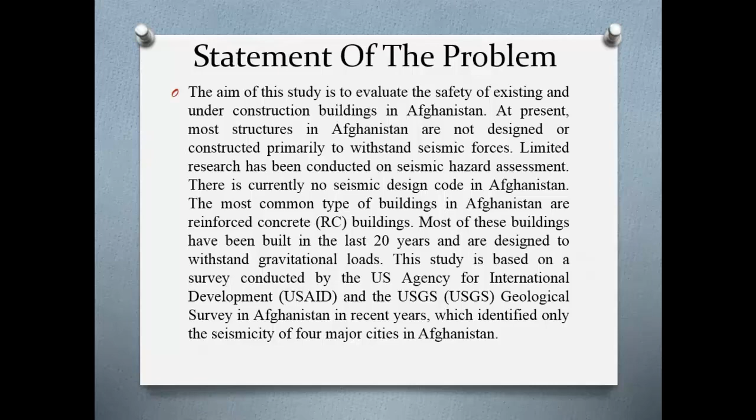This study investigates the seismic damage of 3 most common mid-level RCC buildings, which are very common and include about 60% of mid-level RCC buildings in Afghanistan. The selected buildings for this study are as follows.

1. 12-story RCC building with base plan 46 by 21 meters with shear wall and elevator under construction in Kabul city. 2. 12-story existing RCC building with base plan 14 by 21.5 meters with shear wall as well as elevator in Kabul.

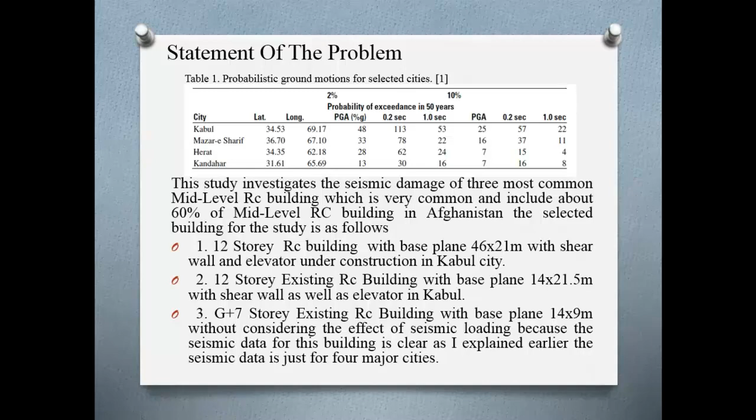3. A G+7-story existing RCC building with base plan 14 by 9 meters without considering the effect of seismic loading. Because the seismic data for this building is not clear, as I explained earlier, the seismic data is just for 4 major cities. Here, 4 major cities: Kabul, Mazar-e-Sharif, Herat, Kandahar. The last building is located in the Bamiyan province. We don't have any seismic data for Bamiyan.

As 40% of existing and under construction buildings in Afghanistan are not considering the effects of seismic loading, or just loading assumption in case of structure design, in this study I have included buildings considering the seismic loading as well as without seismic loading and design.

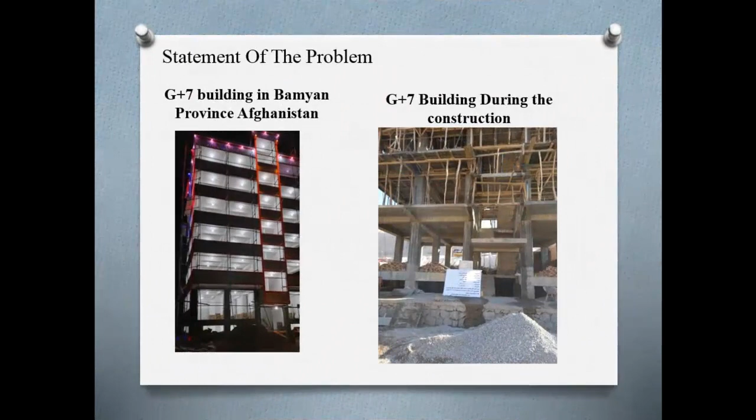3 levels of performance were considered in this study, which include immediate occupancy, life safety, and collapse prevention; gravitational pressure using force control method, and lateral pressure with displacement control using SAP 2000 version 20.2 software pushover analysis. Here is the G+7 existing building in Bamiyan.

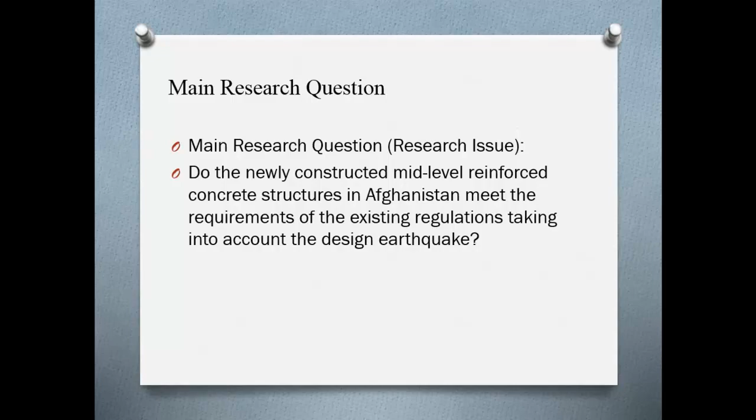Main research question: do the newly constructed mid-level reinforced concrete structures in Afghanistan meet the requirements of existing regulations, taking into account the design earthquake? In general, seismic forces have a dynamic nature, but the design code allows in this research to use the equivalent static analysis method using ASCE 7-16 code.

According to ASCE 7-16 and IBC 2012, buildings should be designed with 2 levels of earthquakes. The design earthquake, which is an earthquake that has a 10% probability of occurrence during the 50 years useful life of the building, and the maximum earthquake that can be expected at the construction site,

which refers to an earthquake whose probability of occurrence during the 50 years of useful life of the building is 2%. The IBC design code is obtained using new maps prepared by the United States Geological Survey, USGS.

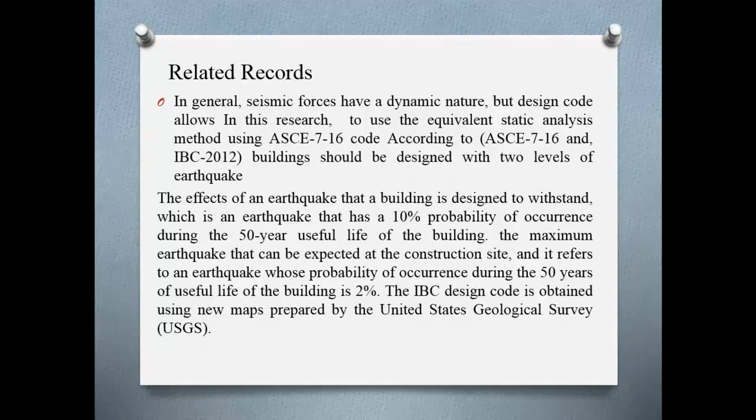In 2020, Paraven Oggu and colleagues conducted a case study on existing 4-story and 6-story structures. Plastic hinge formation during nonlinear static analysis performed on the existing G+3 structure showed that some structural components were inadequate. These observations are clearly expressed from the G+5 structure analyzed prior to retrofitting, as well as from the DCR calculations performed for the earthquake load case.

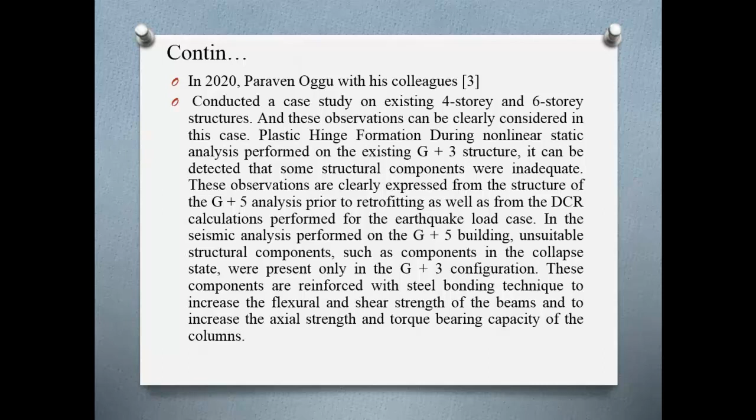In the seismic analysis performed on the G+5 building, unsuitable structural components such as those in a collapsed state were present only in the G+3 configurations. Those components are reinforced using a steel bonding technique to increase the flexural and shear strength of the beams, and to increase the axial strength and torque bearing capacity of the columns.

Khalid Elhadi and colleagues evaluated the seismic performance of a 6-story reinforced concrete building in the city of Abha. Using pushover analysis, the results were compared in terms of base shear, displacement, and pattern of plastic hinge formation. Many results can be drawn from this study. The main conclusions are as follows.

Pushover analysis can identify weak elements by predicting the failure mechanism and accounting for redistribution of force during progressive yielding. It may help engineers take action for rehabilitation work.

Second, the results show that designs by ESEE and IBC 2012 are found adequate. Third, the buildings designed according to ESEE and IBC 2012 are satisfactory. The performance point location is at IO, meaning immediate occupancy level. This means the design satisfies the pushover analysis according to ATC 40.

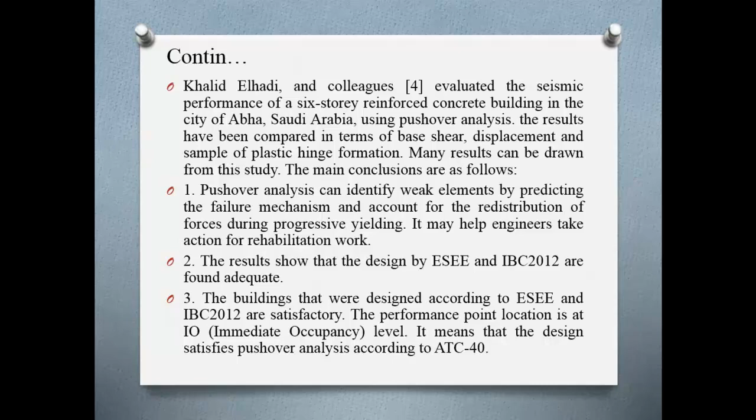Assumptions: evaluation of a 12-story building under construction which has 2 underground floors and 10 upper floors; evaluation of an existing 12-story building which has 2 underground floors and 10 upper floors; and evaluation of an existing 8-story building which has 1 basement and 7 upper floors.

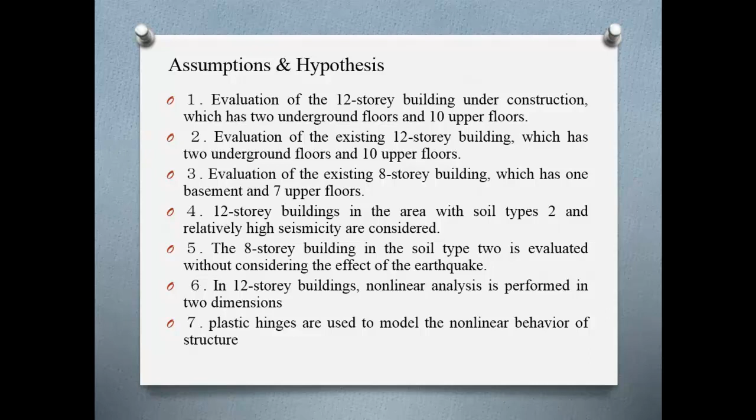For the 12-story buildings, areas with soil type 2 and relatively high seismicity are considered. The 8-story building on soil type 2 is evaluated without considering the effect of the earthquake. In the 12-story buildings, nonlinear analysis is performed in 2 dimensions, with plastic hinges used to model the nonlinear behavior of the structure.

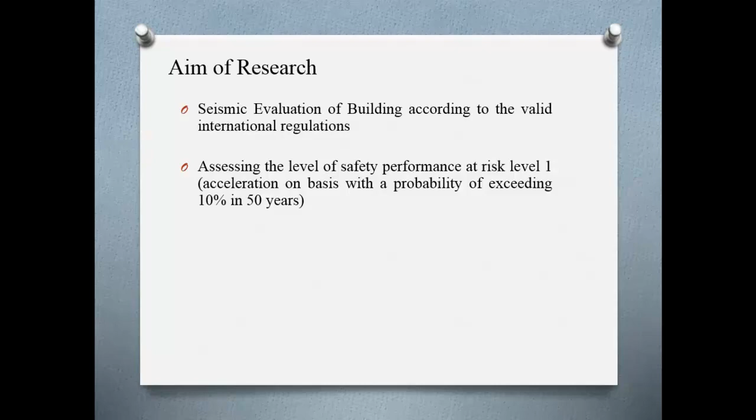Aim of research: seismic evaluation of buildings according to valid international regulations, assessing the level of safety performance at risk level 1, and acceleration on the basis of probability of exceeding 10% in 50 years.

Innovation: one of the important goals of designing and implementing buildings is to maintain the safety of residents at a certain level of risk. In Afghanistan, there are no building design and load regulations.

Usually, the design of buildings in this country is based on loading assumptions. Few seismic studies in the country show that some of the country's most populous cities, such as Kabul, have relatively high seismicity. Therefore, it is necessary to consider seismic design criteria in the design of buildings in these cities.

In this study, the seismic performance of several mid-level reinforced concrete structures that have been built in different cities, including Kabul, is evaluated.

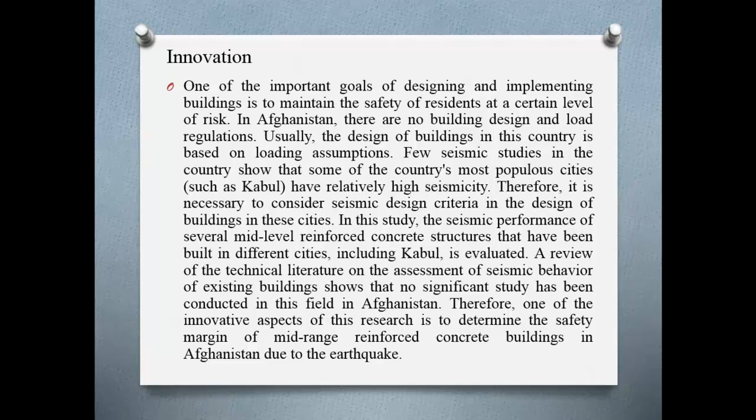A review of the technical literature on the assessment of seismic behavior of existing buildings shows that no significant study has been conducted in this field in Afghanistan. Therefore, one of the innovative aspects of this research is to determine the safety margin of mid-range reinforced concrete buildings in Afghanistan due to earthquakes.

Type of research method: this is a numerical research, modeling, analyzing, and designing the building in 3D using ETABS 18. For nonlinear analysis, SAP 2000 version 20.2 is used. Analysis and design will be according to valid international regulations.

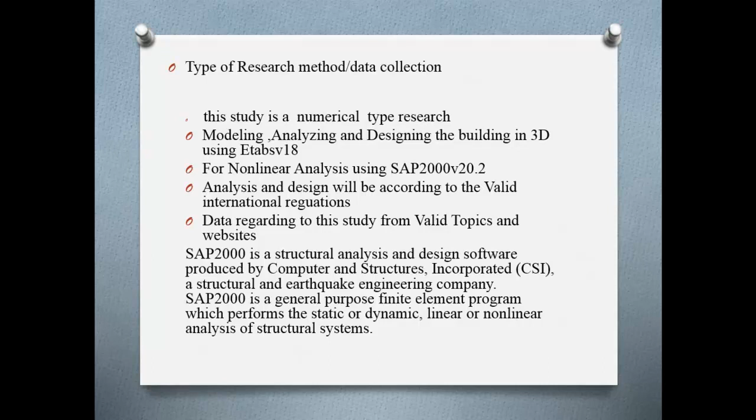Data regarding this study is from valid topics and websites. SAP 2000 is a structural analysis and design software produced by Computer and Structures Incorporated, CSI, a structural and earthquake engineering company. SAP 2000 is a general purpose finite element program which performs static or dynamic, linear or nonlinear analysis of structural systems.

Data collection: the seismic data is from the USGS website and other relevant data is from valid websites.